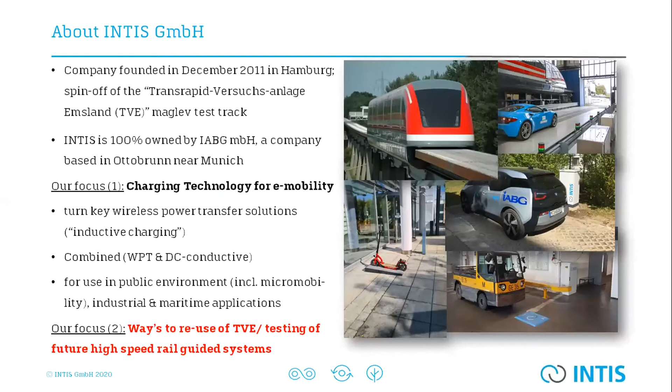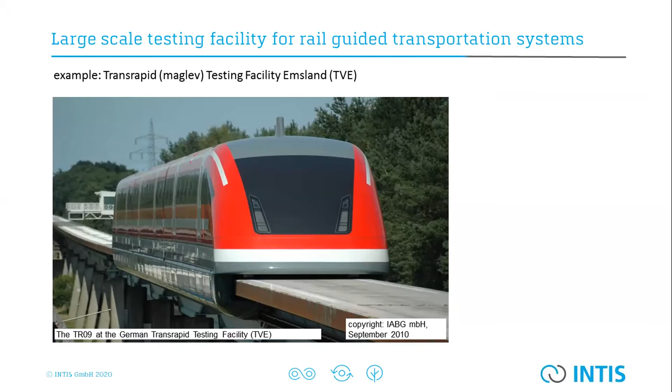Good afternoon to everybody. Very pleased to have a second chance to introduce a bit. Last time I had the chance to talk a bit about large-scale Hyperloop testing, possible Hyperloop testing facilities. I don't want to go through everything again because I think most of the audience did already participate at the last conference. If you remember, it was related to giving an overview about the maglev testing facility in the Emsland, which is still existing, which has not been taken away yet. And we are still looking forward to find future possibilities to provide services to high-speed rail applications. Might be maglev as this one, or might be also Hyperloop applications, where then obviously we would have to add something on top of the guideway, which I wanted to show you right here.

As also presented during our last meeting, there are different ways to get the facility converted to Hyperloop applications. Not necessarily from the beginning would a tube have to be mounted on the guideway, because most of the current developments are not yet at the stage to run their vehicle on guideways at full speed. So there are still a lot of investigations to be done with the vehicles and the motor, propulsion, guidance, levitation, which do not necessarily have to have a tube on top and run in vacuum, because many aspects still have to be investigated. Is the control system for levitation, for example, stable? How can you synchronize the motor with the vehicles?

That kind of questions. However, one day, if we come to the point to provide services at higher speeds, let's say more than 300 kilometers per hour, then obviously we need to put something on top of the guideway, where I have summarized here just a few ideas how it could work at our facility. Currently, the distance between the ground supports is 25 meters. We are not clear yet whether 25-meter long tube elements could be manufactured with tolerances as necessary for high-speed operations.

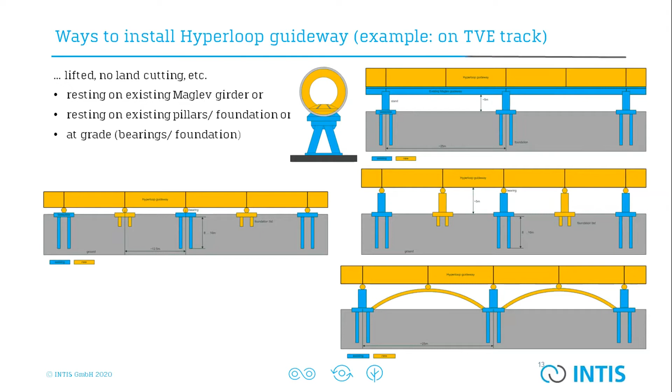During our last presentations, a few questions came up concerning inductive wireless charging, and therefore I would like to concentrate today a bit more on what wireless charging is and what role it could play for future Hyperloop applications. Therefore, I need to change now to another presentation.

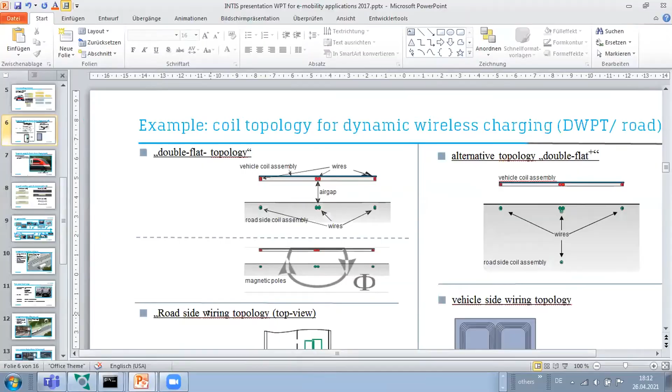So what I would like to introduce to you now is what is wireless power transfer systems, especially for mobility application, and here for today, how could it be used also for Hyperloop systems. First of all, just a few words to Intis. Intis today has two main tasks. One is to maintain and keep operational the maglev test, or to find future opportunities for maglev testing facility operations.

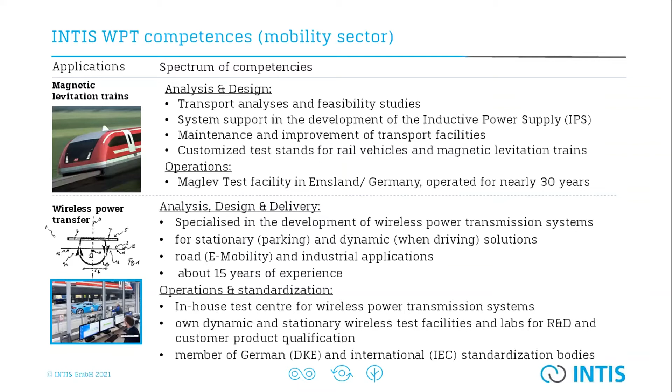And as we already with the TR09, the last German maglev vehicle, started to learn something about wireless charging, because this vehicle was already equipped with wireless charging equipment, we converted a bit our main engineering focus for today in the direction of wireless energy transfer systems for transportation applications. So what is wireless charging, and why do we believe that wireless charging can drive the transition to pure battery electric mobility, especially road mobility?

Well, later I will come to the point how it works, but there are a few aspects which obviously can help to drive transition to battery electric mobility. First of all, you do not have to plug a cable. It also supports autonomous driving and automated driving, and future driving without any drivers. It is fully automated.

It is invisible technology, because it's intended to put the coils which generate the magnetic field really under the floor, so there is no risk of degradation on the system components, or vandalism, things like this. It's highly efficient. It doesn't require any maintenance. That's very important.

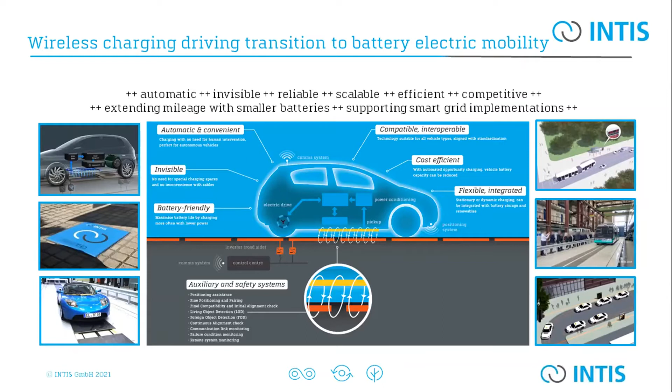And we can develop a vision that also in our future cities, where we hope to have many electric cars on the road, we provide some charging technology which doesn't require all this cabling, which I think is very important. Left and right, the pictures give some examples of wireless charging. Some of them I will dig into in the presentation now.

We distinguish between stationary wireless charging and dynamic wireless charging. Stationary wireless charging is quite comparable to conductive charging without cable, while the vehicle is always in a certain position, so stationary. For stationary applications, we consider transfer power in the range from 3.5 kilowatts to about 30 kilowatts. It's fully enough. If we talk about trams or buses or BRT systems, it may go higher, up to 300 kilowatt at least is possible.

It's a charging technology where the energy flows via a primary coil, which is installed in the road only at one charging point. And in accordance with standardization of wireless charging, we have to make sure that with misalignment of the coils in X and Y, driving and transfer direction, we are able to transfer the power with the full requested efficiency, which is defined as 85% or more, with misalignment of plus and minus 10 centimeters in each direction.

The primary coils will be invisibly installed on the surface or under the surface of the road, and the dimension of the coils, especially the secondary coils installed in the vehicle, drive the amount of power that can be transferred to the vehicle. It's contactless, free from wear, low maintenance, as I said. And the other part is dynamic charging. This is charging while driving.

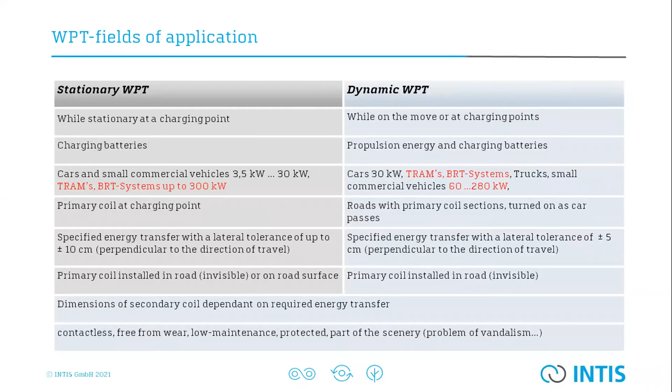The power transfer rates are a bit higher. For cars, we expect not more than 30 kilowatt of power to be transferred. For trams and buses, it might be something between 60 and 280 kilowatts. How does it look like? In the middle, we see this.

The vertical is the power path. Let's start at the lower part. We need somehow to connect to an energy supply or to a grid.

Then we have some components which convert the usually 50 hertz AC energy, current or voltage, to a quite high frequent alternating current, usually between 20 kilohertz and 85 kilohertz. That current is driven to a coil which converts to a magnetic field, and then from the road to the vehicle side, the vehicle also has such a coil. This alternating magnetic field is picked up by the vehicle side coil, is then being rectified and fed into the battery. This is the power path.

Today, if you look at standardized systems, it's going up to 25 to 85 kilohertz at 22 kilowatts.

There's a lot of equipment we need in addition for making sure that if there is some living object in the air gap between the two coils and the magnetic field density would overcome defined and allowed limits, the magnetic field will be switched off. That's what we call LOD, living object detection, and also foreign object detection, because if a thicker metallic part is placed directly on the road coil, it may heat up too much, and that also needs to be found out and switched off.

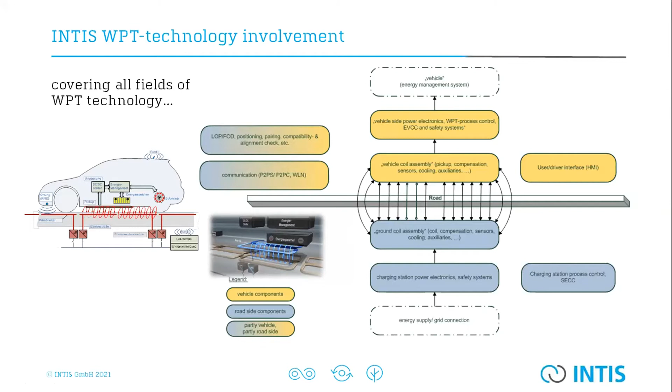This is what we call the auxiliary equipment. Then there is communication, because vehicle and primary side systems have to communicate to control the power and to ensure safety of the system.

There are different ways and topologies for the coils which you can install in the road or in the vehicle. Here's an example for a so-called double D, double pole geometry, which you see in the left down view. You can install it in a different way. On the right side, you see an example for the coil topology as it would have to be installed underneath a vehicle.

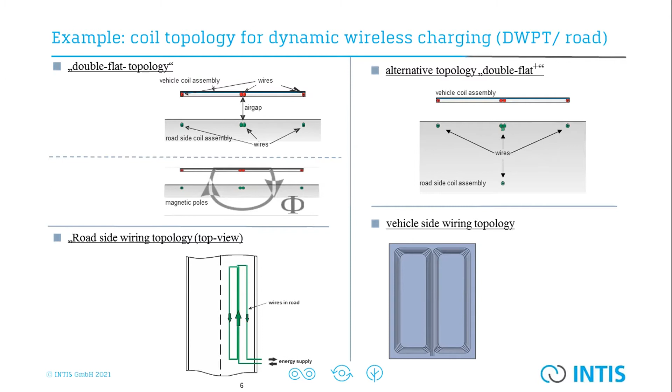Here is an example for dynamic wireless charging, already implemented in 2009 at our facility. You see the two big black cables underneath the guideway table. This was used for Transrapid when driving lower than about 80 kilometers per hour, in order to transfer power of up to 2 times 250 kilowatts to recharge the onboard batteries, at the time at a frequency of 20 kilohertz.

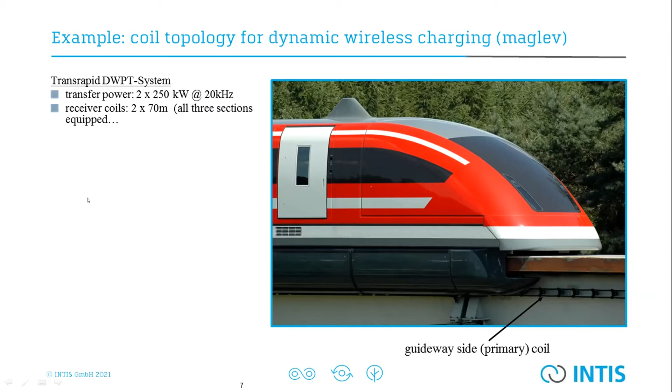Today we would go to higher frequency because semiconductors and electronics today support much higher frequencies. The pickup coils were installed in the maglev system, and there we had about 2 times 70 meters of space for installing the pickup coils in the vehicle, and therefore we could also provide the 250 kilowatts.

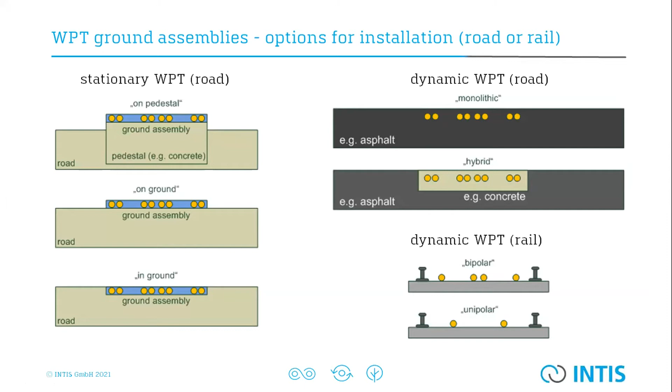This is a way we could install wireless charging coils, for example in the road, on ground or in ground, whereas in-ground is preferred today, or on the right side for dynamic wireless charging, either directly in the asphalt or a hybrid solution with concrete blocks in the roads. There are also two examples for how it could be done for rail application, not maglev but rail, where even though the steel rails are very close to the wires driven by the alternating current, they would not get too warm at distances more than 10 centimeters away.

This is the field of application for wireless charging.

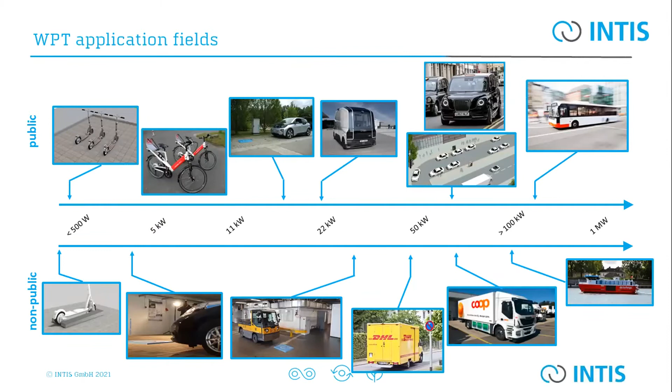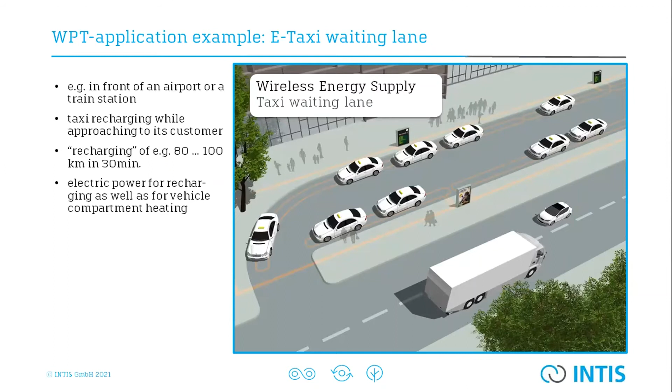Here's an application for dynamic wireless charging for taxi applications, which will be implemented with us and other partners currently in Cologne with LEVC London cab taxi vehicles, which shall run as from 2022.

Here are some ideas about dynamic wireless charging for buses. The idea is not only to charge a bus when it's waiting and exchanging passengers, but also using the whole lane, a specific lane, or in front of a traffic light. On the left side, we see such an implementation at our facility.

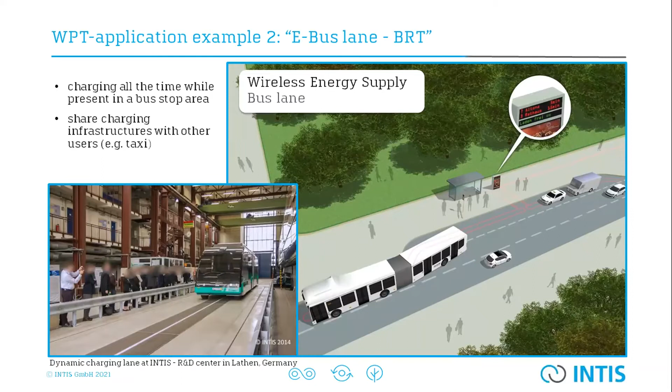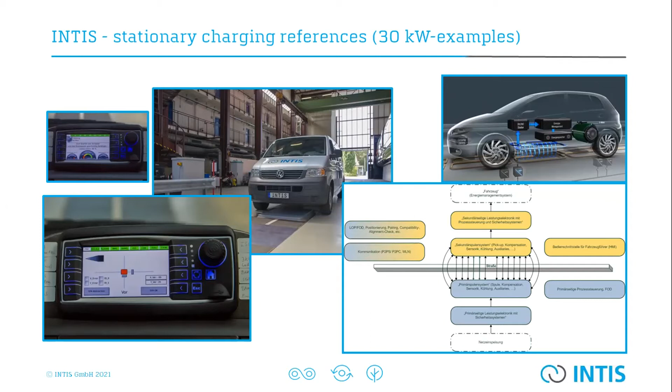Here are a few more photographs of how inductive charging systems look, and also a screenshot to give some positioning support. When you don't see the road coil anymore, you need to know where to go in order to align the coils to each other. Here are some other photographs. Recently, we have started work for autonomous vehicles.

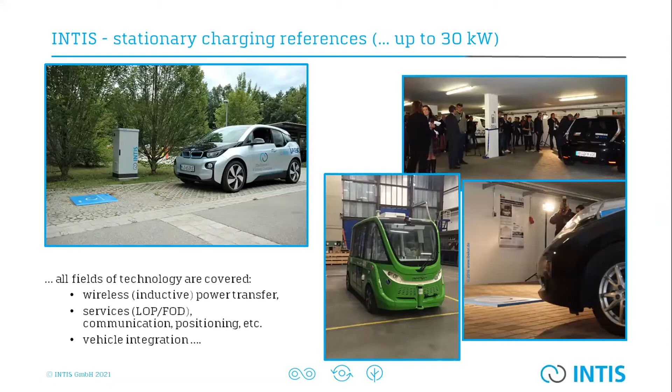It's a Navya vehicle from a French company, Navya, which will be equipped now with inductive charging for an application in Groningen. Top left, it's an application we have provided to Munich. This is stationary charging, 11 kilowatts, according to standards, and many more.

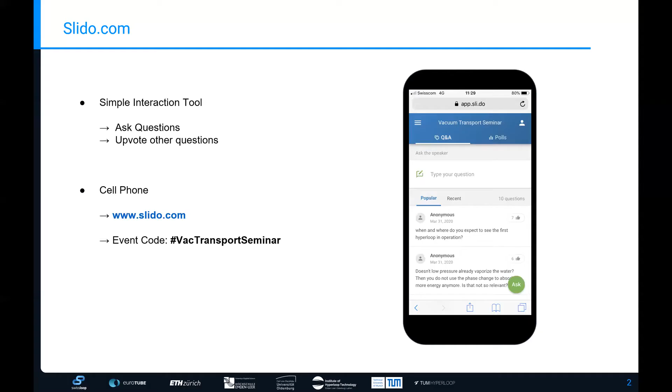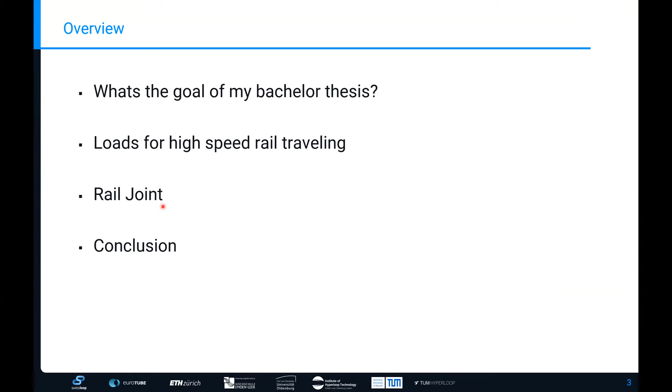We mentioned before where you can post your questions. So let's start with the overview. First, I'm going to talk about the goals of my bachelor thesis, then about the loads occurring for the special parameters we set at the Alpha Tube here in Switzerland. I'm also going to talk about the rail joint, which is crucial for our bridging mechanism, and at the end, I'm going to summarize everything.

So you probably know the situation: we have a vacuum tube on the right. There is a test track in this direction, already at low pressure, and now we want to enter the test track, the tube, with our pod. The problem is we don't want to flood the whole test track with atmospheric pressure, because it is a really big volume. So we install an airlock on the left side, which has a relatively small volume and doesn't take much time to pump out the air. We do that, and then we can open the valve which separated the two sections.

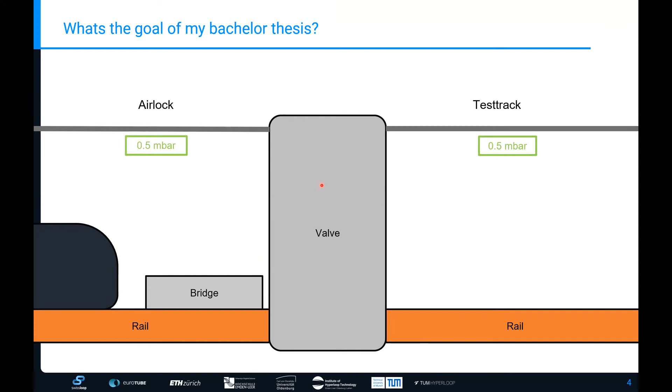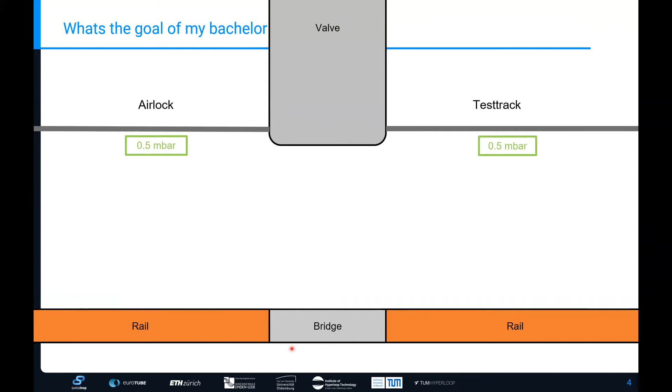Now there is a gap inside the rail, which we need to fill with a bridge, and then our pod can drive into the tube. The main task of my bachelor thesis is now to come up with a solution for this bridge, which also works for high speeds up to 900 kilometers per hour, which is the aim for the Alpha Tube test track.

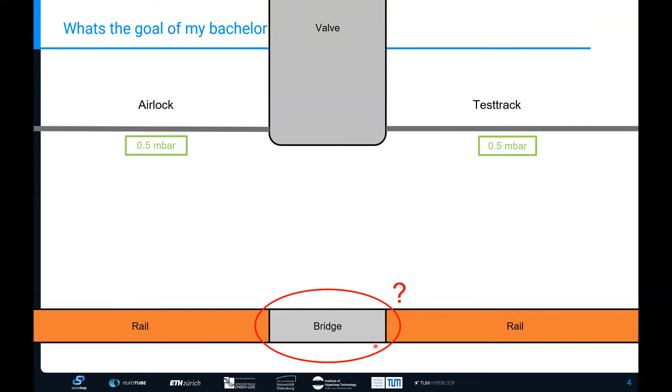The problem here is we use these rails as suspension rails on the left side and on the right side. We use these standard railway rails because we want to remain a certain interoperability between the pod and the standard railway. You can imagine, for example, that we drive long distances from Zurich to Geneva, and then for the last kilometers or meters, we leave the track, the tube, and drive on existing infrastructure, for example from the SBB. That's why we chose a standard rail profile.

The problem with this profile is that it has a big undercut, marked here in gray, and if you imagine the valve needs to slide from above, it is hard to seal this undercut. The solution is that we clear the valve gap here fully, so the geometry of the valve is easy and it is not hard to seal the outline of the tube.

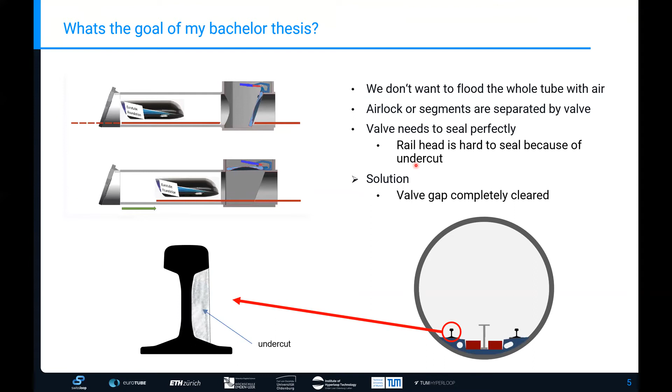Of course, this leads to problems, and the bridge needs to withstand some loads. Now I'm going to calculate the load specifically for the case of Alpha Tube.

The total weight of the pod is 1 ton, that's the total vehicle load. Later in commercial use, of course, this total weight will get bigger, but by adding more wheels, the wheel loads can be 1 ton or 2 tons. We also assume that the total load can rest on 1 wheel.

That's just the worst case we consider here. We also defined a load angle theta, which is often used in aviation. This load angle is the angle between the total acceleration and the gravitational acceleration. The total acceleration consists of the gravitational acceleration and the centripetal acceleration occurring in track turns. We set the maximum load angle to 30 degrees.

The reason for that is that the maximum banking angle in curves, alpha, is also 30 degrees. That means that when you're driving through a track turn at top speed, you don't have lateral accelerations parallel to the track bed. This is good for passenger comfort because then they are only pressed into the seat and not to the side.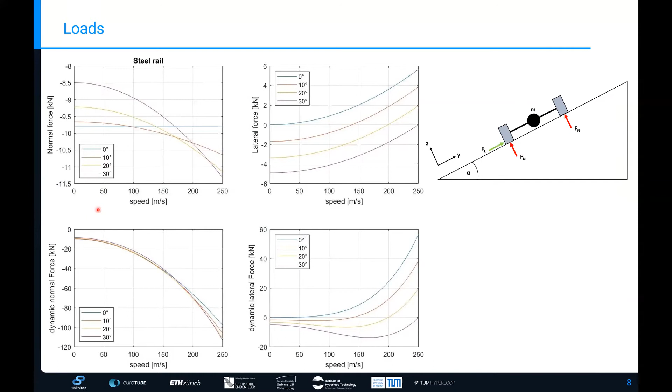I'm now interested in the maximum force inside a track turn or on a straight. For the maximum normal force, at our maximum banking angle, it is found at maximum velocity, and it is approximately 11.3 kilonewtons. As we said before, the lateral acceleration gets to 0 at top speed, so the maximum lateral force can be found at standstill and is about 4.9 kilonewtons.

We can compare that to the static forces occurring on a conventional rail, for example the SBB, and we can see that our forces are much lower. For the normal force, it is 10 times smaller than for standard railways, which means for the static forces, we are on the safe side for the rails. Of course, these forces need to be taken into account when calculating the stiffness of the bridging solution so that no big deformations or dislocations occur.

Additionally, there are dynamic forces. These dynamic forces occur because the rails are not perfectly flat, but have slight imperfections and waves on them, which lead to accelerations of the vehicle. For the lateral force, these dynamic effects are not very important because it gets smaller with increasing speed. But for the normal force, it can get up to 10 times bigger.

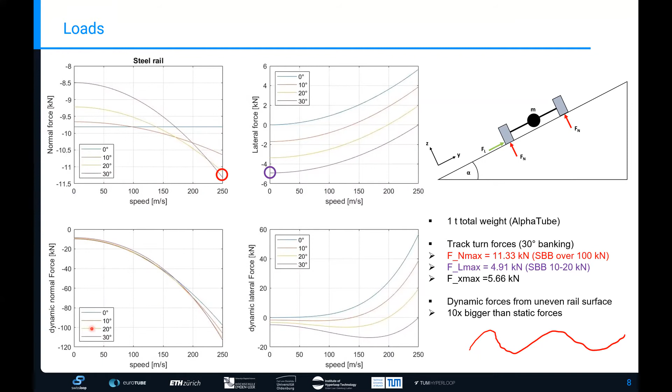So another crucial element is the rail joint, because we need to clear the valve gap. The two rail ends can't be welded together as it would be done on a normal railway.

Now I want to define, or at least discuss, which type of misalignment is most suitable for our high-speed case, so 900 kilometers per hour. The first case is a vertical drop, where the second rail is lower than the first one.

The good thing about this case is that from a critical speed on, about 10 kilometers per hour, the wheel loses contact with the first rail and becomes airborne. The advantage of that is that the impact speed stays constant and is only dependent on this vertical misalignment, so we get really low impact speeds and also low impact forces. The problem, however, is that this wheel can stay airborne for quite a long distance, and it needs to be observed if this has a big impact on the braking distance, for example.

The second case is this one, again a vertical step. This is the worst case of all three cases which can occur, because here the impact force rises linearly with the traveling speed.

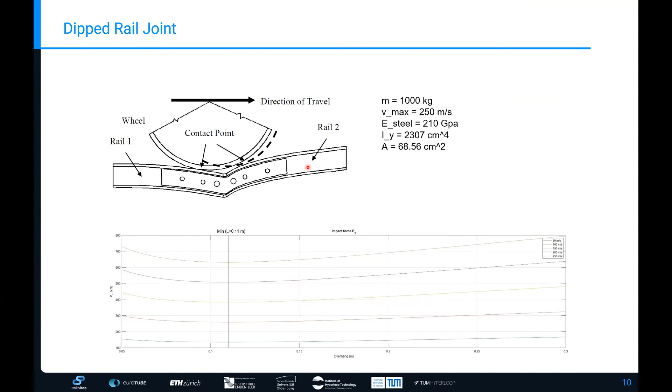For this specific case, I calculated the maximum impact force by doing energy conservation. Here on the top right, you can see again the parameters for our specific problem with our top speed and overhang length, and we get a maximum impact force of 650 kilonewtons. This is over 6 times higher than the static forces we found on the conventional railway. So this case is also not usable for our high speeds, and we can only use the first case with a vertical drop.

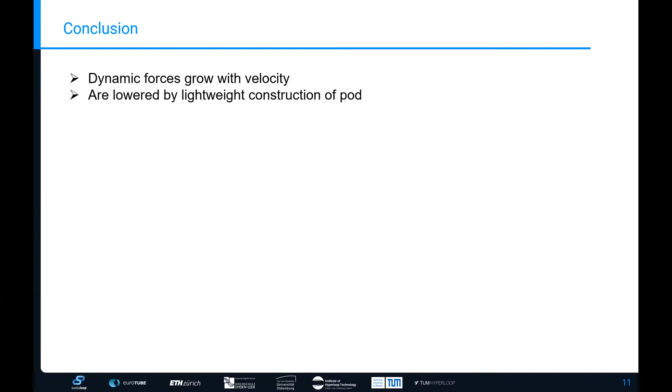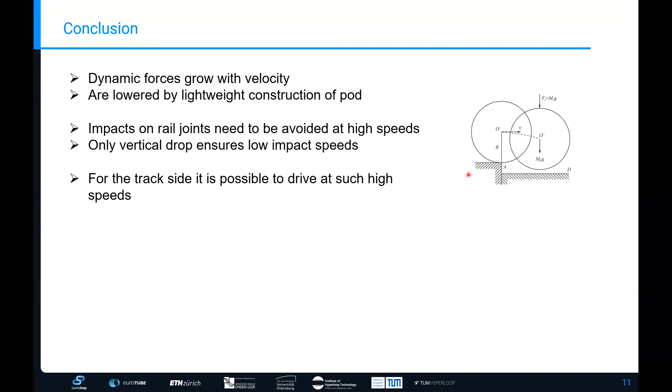So let's summarize everything I said today. First, we saw that the dynamic forces grow with velocity, but as we are using lightweight constructions for our pod, we can reduce the wheel load and therefore stay inside the borders we defined. Also the dynamic forces can be lowered by freshly grinding the rails, reducing imperfections and waves, which I talked about. The second thing we saw is the rail joints, where we need to avoid a big impact on the rail and the wheel. We saw that the only suitable case is the one where we have a vertical drop, which leads to low impact speeds. So for the track side, it is possible to drive at such high speeds with conventional wheels and conventional rails.

If we do tests and see that this wheel and rail pairing does not work, alternatively, the pod could also have a levitating system installed, which can be magnetic or with air cushion, and this would avoid these contact problems we have with the rail and the wheel.

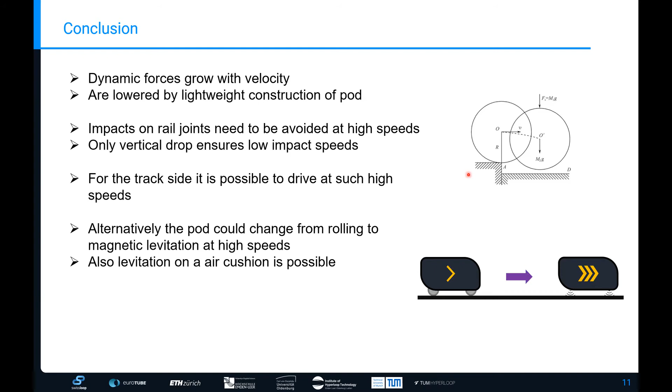So that was my presentation about high-speed railways. Thank you for your interest, and now it's time for your questions.

Thank you very much, Nico. It was very interesting. So we'd like to go to the first question.

The question is, what are the highest speeds that SBB normally drive over such rail gaps? So for instance, Weichen, switches.

Yes, so for SBB, for the rail joints and rail gaps, it's 80 kilometers per hour, but for the switches, the Weichen, it is higher, up to 150 kilometers per hour. There is also an example of the SNCF, the French railways, where they did a high-speed run of the TGV, and there they ran over a switch with over 400 kilometers per hour. I think it was even around 500 kilometers per hour. It's very high. Yes.

Then the next question, somebody's wondering regarding the airborne case you talked about. Can you give an estimate of travel distance for a 0.1 or 0.25 millimeter gap? So I calculated the case where we have a misalignment of around 1 millimeter, a vertical misalignment, and there the wheel can stay airborne for around 3.5 meters traveling distance.

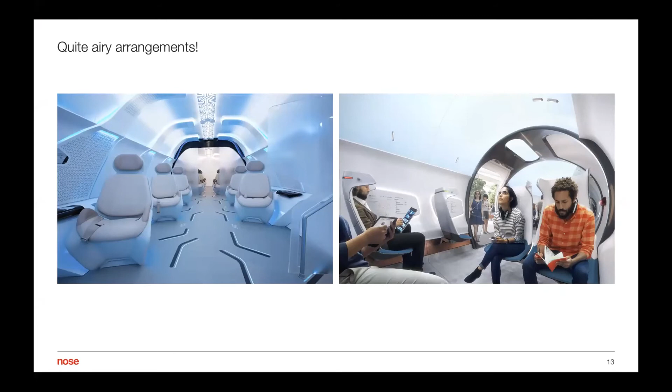So when I was looking at the current Hyperloop ideas and concepts, I was looking also at the interior design, or the stuff you see on the internet. You see studies, mock-ups, one-to-one. Here on the left side, for Dubai, I think, they did actually build a nice mock-up. Here on the right side, it's just a rendering. And then there was a study of Teague Associates, also industrial designers. And I looked at all these pictures and I thought for myself, okay, this looks quite okay-ish.

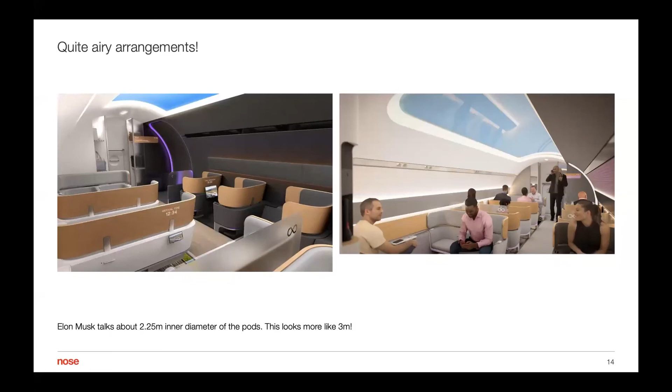But on the other hand, I've seen that Elon Musk, in the original paper, I assume, was talking about an inner diameter of the pods of 2.25 meters. And that was even the larger pod he was talking about. He was also talking about an even smaller pod, which was dramatically smaller. So I look at these pictures and say, oh, wow, this looks more like a little bit more than 3 meters diameter. And so I thought, obviously, this is a unique opportunity for the whole industry to make a clever and strategically sound decision on what is going to be the best diameter for this new exciting technology.

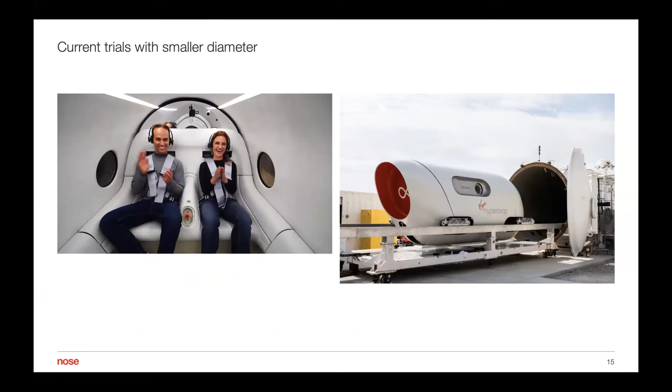The current trials are done with really small pods. I think you're all familiar with this one. And so I was thinking maybe it's a good idea to look a little bit sideways. What are other industries doing, or what have they been doing? So I was trying to make an interesting comparison with commercial airplanes.

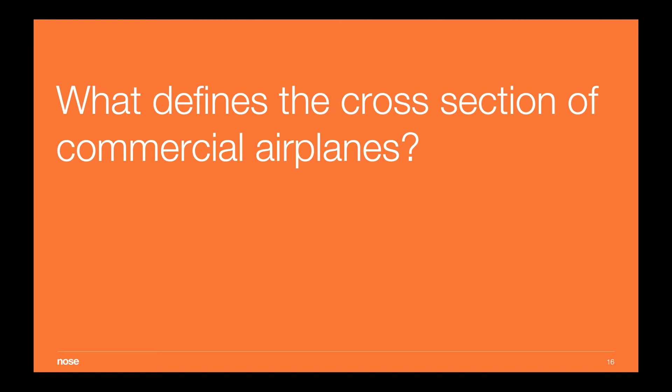I would say commercial aviation has been happening for roughly 80, 90, 100 years. So they had a lot of time to optimize the technology. And there's a very capitalistic system behind it. In most cases, there are no subsidies from the state. So somehow it's like an evolution forced by commercial forces: what is reasonable depending on the spectrum of usage.

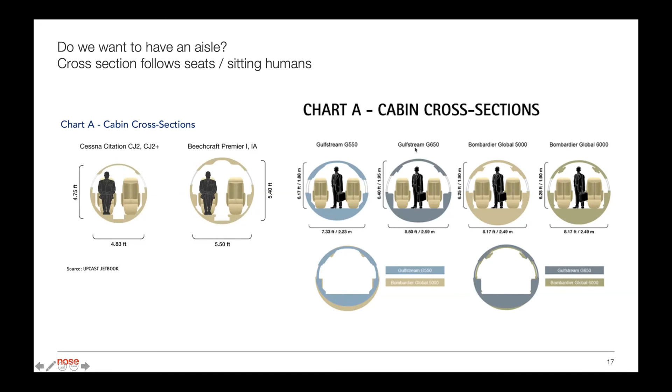So I was looking on the internet at typical cross sections of airplanes. Obviously you start with very small diameters where you don't even have an aisle. You should not do too long tubes like that because nobody would be able to enter properly. Then the next step, a little bit larger, where you have kind of an aisle. Then you take a next step and have one aisle. Obviously you waste a lot of surface if you look at it from the ground floor, or if you look at the diameter, you waste a lot of cross section just for getting to your seats. Things improve when you go to larger diameters.

But to give you an example, if you look at cross sections, 2x2 arrangement, 3x3 arrangement, you never see a 2x3 arrangement. And then if you go further from 6 in a row to 7 in a row, you discover, oops, you need a second aisle. And then you make a jump from like 4 meters something to almost 5 meters. So obviously you cannot scale it smoothly as you might want to, but you have to decide: are we going to start with a proper diameter for the pod and then deduce the diameter of the tube, or do we go the other way around and look on the market for tubes which we can buy ready as they are?

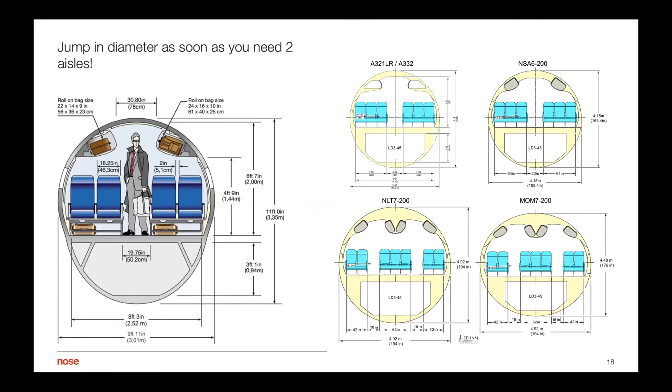And so I came back to railways and was looking, okay, what happened actually in the railway sector a long time ago? And if you look into history, we have certain standards developed regarding the expectations of passengers. If you look at what's happening on the market nowadays, you could simplify it and break it down to these requirements. Typical passengers think up to 10 minutes standing is okay; for 10 to 20 minutes, a perch seat, a bum rest, would be needed.

If you expect to travel up to 30 minutes, people want to be properly seated. It doesn't have to be such a comfortable seat, but it should be a seat. If we go to 120 minutes, we end up with intercity seats with tables. People want to work, listen to music, watch videos. They will need a toilet. They will take along larger luggage.

So if you increase the travel time beyond a certain measurement, you end up with this whole list of amenities you have to provide. Things go absolutely out of hand. If you go up to 600 minutes, 10 hours, you definitely will need a restaurant. Otherwise, people will have a little revolution on your train. And if you go above 10 hours, obviously you need beds. People want to go to sleep and so on.

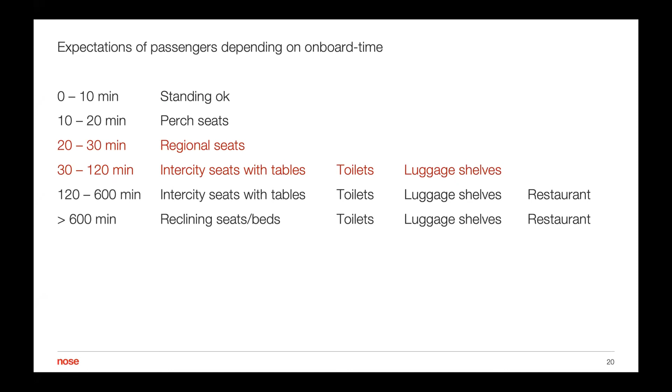So now what we are currently talking about is, like Elon Musk talks about, 35 minutes. So we are somewhere around here. Critical for us will be toilets and luggage shelves. Is it going to be necessary to provide toilets? It depends on what kind of passengers you want to talk to. If you talk about elderly people, it might be an absolute requirement.

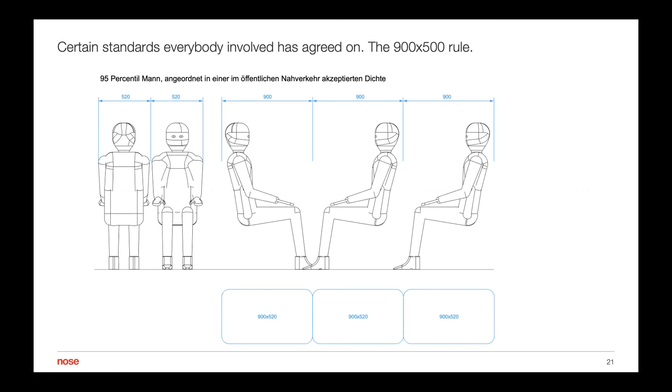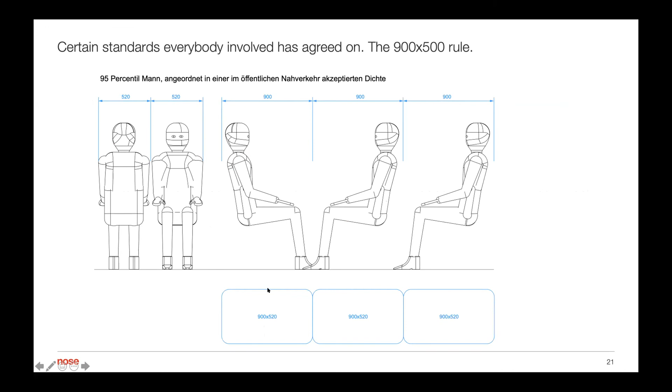Then in the railway market, we have certain standards which almost everybody has agreed upon by now. I call it the 900 by 500 rule. Roughly, everybody is more or less happy if he gets 900 in this direction, which is much more than in a typical airplane, and a width of 500, 520, 480, depending on comfort.

So then we have in the railway market also quite an interesting problem: we have some laws. We cannot do what we want to do. There's a European law: if you have a regular schedule of public transport, you are required to have at least 10% of all seats cater for the needs of persons with reduced mobility. We call them the so-called priority seats for PRM.

For example, this is a picture out of the norm. They require you to provide certain spaces. They require that the armrests have to be foldable. If somebody is very heavy and fragile, you have to fold up the armrest and so on. So typically the SBB, Deutsche Bahn and ÖBB provide everybody this comfort. Otherwise, it would be too complicated to make a distinction between those seats and the special seats.

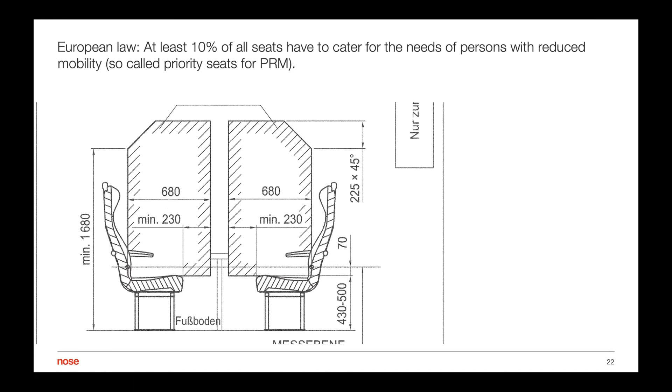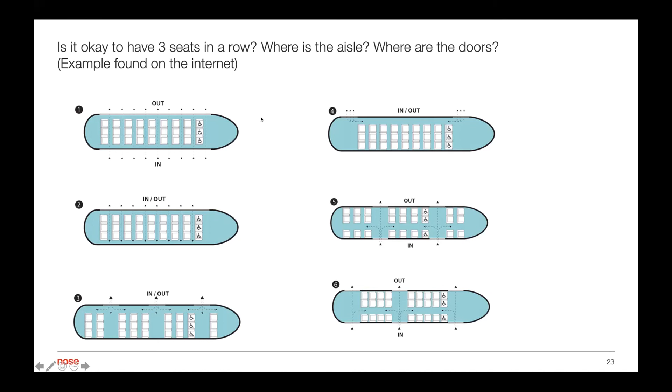Then the big question: what is socially okay? Is it okay to sit 3 in a row? And if you do that, do you enter along the train at certain points? Are there going to be 1 aisle, 2 aisles? How many doors? Quite difficult tasks. If you have a pressurized cabin, if you look at a typical airplane door, it's quite a construction. So you don't want too many doors, and probably not necessarily sliding doors. This is just an example found on the internet.

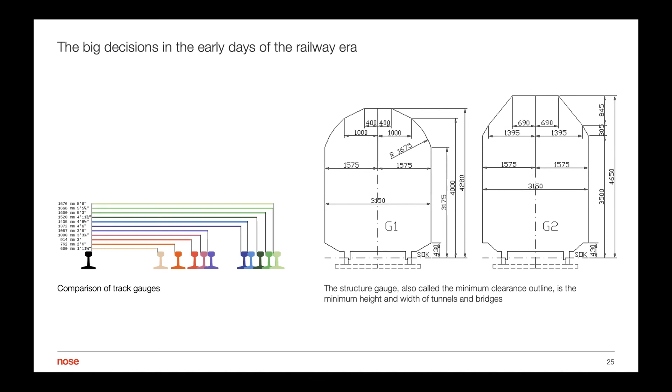Then, together with other railway projects, we found out it's always the infrastructure that is dangerous, meaning expensive. And so that's where I come to this big decision point. In the early times of railway, there was a lot of discussion on the proper track gauges, and on the proper structure gauge. This is the cross section of the tunnel you have to fit into, the minimum clearance outline every train has to pass through. And I'll give you a little example.

If you compare a little 1 meter track railway up in the Swiss mountains, the 1 meter allows, together with the slow speed, that's something really important, to have small radiuses, which means you can follow the terrain quite easily. And that means you have smaller bridges, smaller infrastructure cost.

And if you compare it with a typical high-speed train of today, if the terrain is not so suitable, not so flat, you have a sequence of bridges and tunnels and bridges and tunnels, nothing else. So these things get really expensive depending on the speed, which we are not going to alter in our project, I think. But nevertheless, the cross-section will play a part in defining the cost for the tunnels and the bridges.

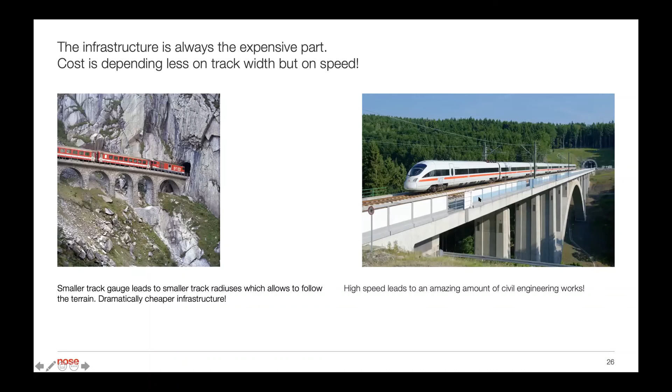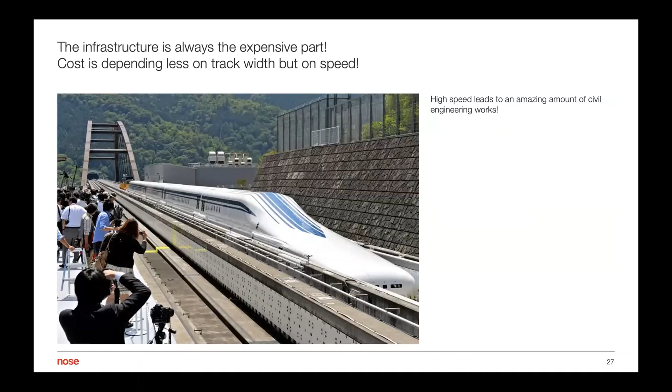A really bad example of extremely expensive infrastructure you find in the Japanese maglev, where they have chosen quite a hilly test track area, which is amazing. They have built like 40 kilometers of only bridges and tunnels. So how would the cross-section look if we designed according to the rules of the railway industry?

And so I started with a typical railway seat with the typical dimensions, typical aisle width, which is also required by European law. And then I tried to fit the smallest possible diameter around it, leaving the extra space for lighting, the yellow stuff, fresh air, old air ducts, the blue stuff here, and maybe squeezing in a really small toilet. Could work like that.

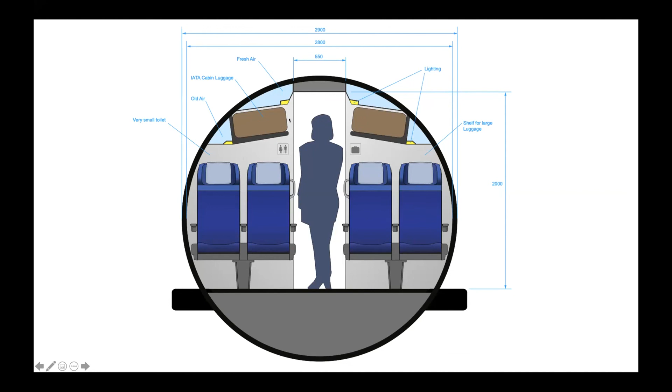People will not be so happy. It will not look as beautiful as the renderings we have seen before. You have to imagine when you walk through this aisle, you will have your head in this really confined space. And then if you want to sit down, you have to hunker down and kind of squeeze into this area. But well, that could be done.

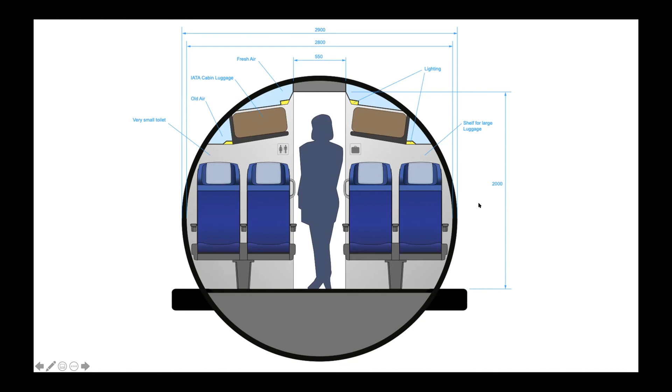You will have to add another 50% of the actual seating area to just include these things. So that leads to the idea, maybe it's a better idea to have like 50 seats in one pod. So 50 people would share one toilet, and that would improve the overall efficiency.

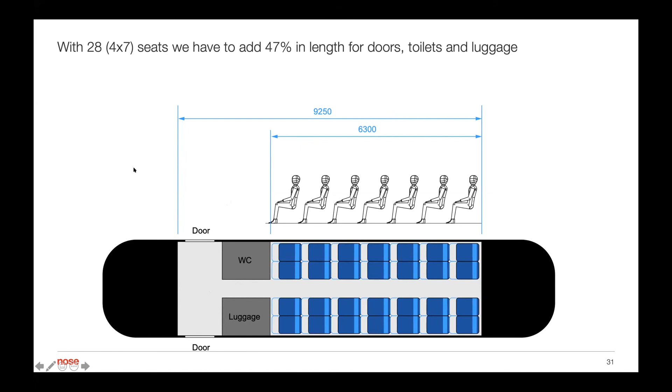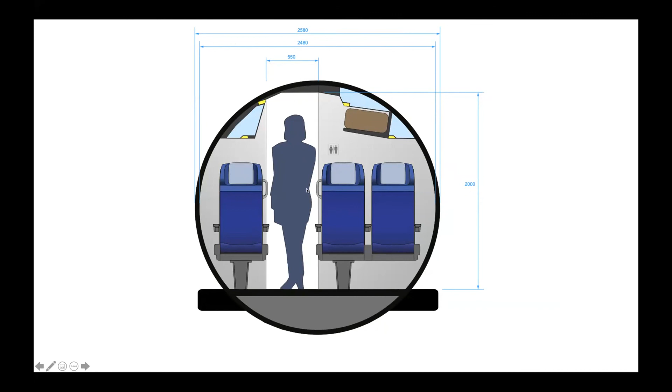If you squeeze even further, you end up wasting space here, because in this case, I chose the diameter so that we still have this aisle height, which is required to be 2,000. And so if you take this as a given, you end up with a diameter of 2,480 on the inner side, and a diameter for the tube of still 2,580.

And if you look at this situation, considering length, you have to add a little bit more, 47%, but still, it's the same thing. Make it longer and you will improve efficiency. But you cannot always make it longer and longer, because in the end you will need a second door, and then you have to put in extra space and weight again. So it's really a fine balance finding the optimum.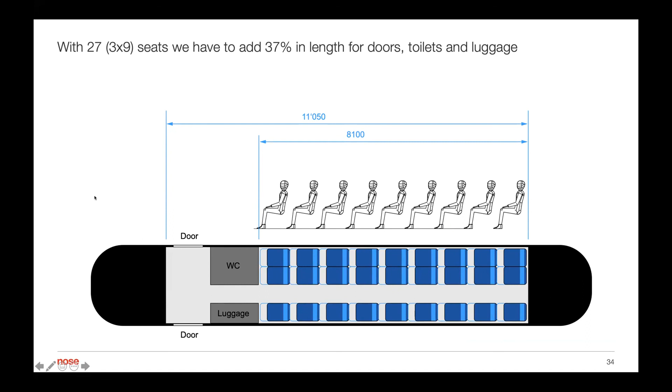So this is the end of my presentation. Thank you. Any questions? Thank you very much, Christian Harbeke. It was really very interesting to have such an insight, besides all the otherwise very technically focused topics. So I would like to dive into the questions.

The first question is, do you also consider the psychological aspect when designing the interior? How would you solve, for instance, the problem of not having windows in the pod? Yeah, good question.

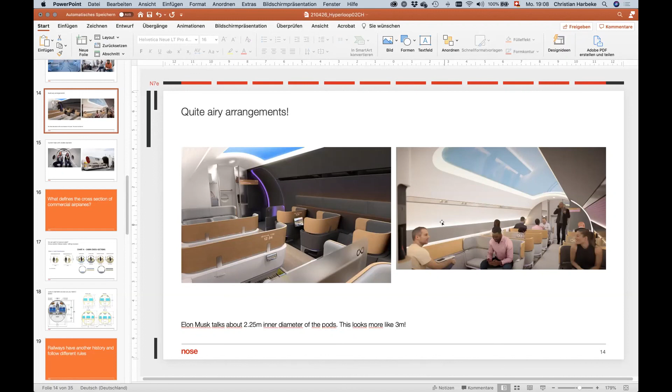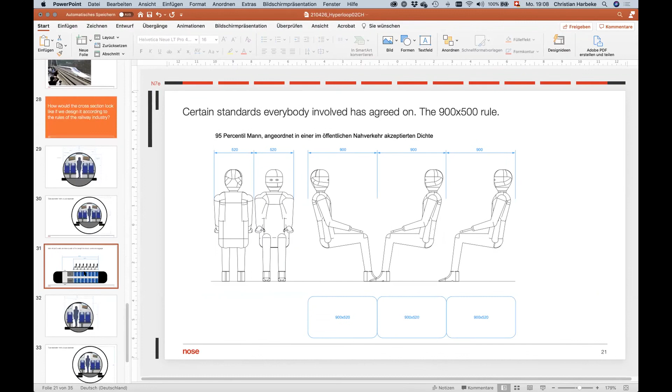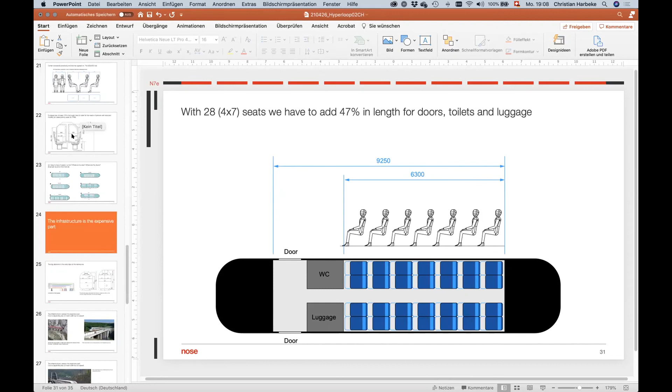Yeah, it's quite simple. You just have to follow this rule, 900 by 520, and then you arrange them like that. If you go crazy, you squeeze it to 800, and then you might add a third one on both sides, 6 in a row with a small aisle in between. That's more or less the maximum. Then you're looking at something like Ryanair flying to Mallorca, that kind of arrangement with a pitch of like 800, something like that.

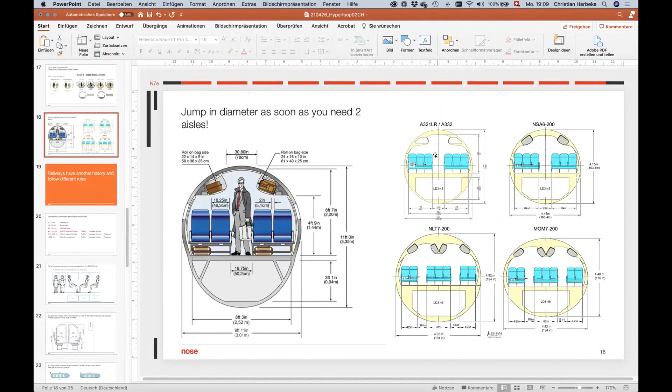But the market shows that people often think about the price first, choose Ryanair or EasyJet. It's less expensive, and then they discover, okay, I have to sit for 4 hours in a really tight space.

Okay, then we have 2 questions which are quite similar, so I combined them. 2 people are wondering how the seats will be designed. One is wondering, will it be like a tram or metro seat? And the other is wondering, will it be like bucket seats in fast cars?

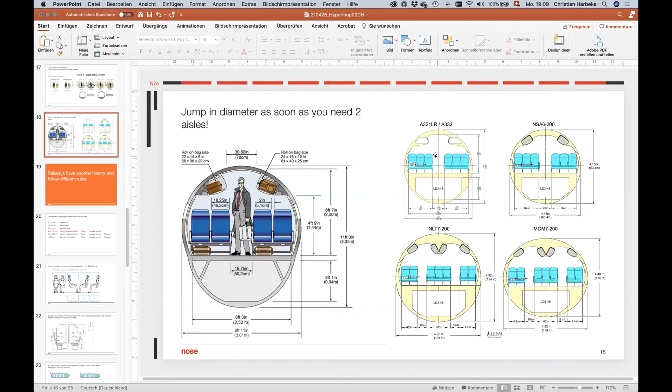That's quite an interesting question. If you want to put some G-forces, lateral forces and longitudinal forces, then we will need some kind of racing seat. But it's like a marketing decision. You either have a roller coaster feeling, pretty exciting, a lot of acceleration, you get a racing seat, you feel like sitting in a Porsche without windows, and then you hurry up and you're fast. And then you just look into your iPhone or whatever, and it's small.

Or the advantage of current railway travel is you can stand up, you can walk around, you can have a phone call, take out your laptop, start working, and all these things, which are not possible in a confined space with racing seats. And also there, I see a clear distinction. When you go above 30 minutes, I think things start to change.

If I'm on a train for more than like 15 minutes, I start working, on a current train. Other people wait a bit more maybe, but really, if you're sitting 1 hour in a train, you want to have some comfort. You might want to sleep. You need a comfortable seat and something to drink, laptop, music, video, yeah. Then you change a lot of things, you should even change the acceleration forward and sideways.

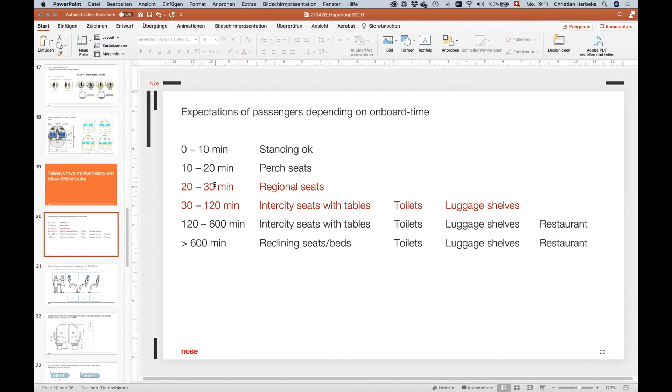And then you have the whole problems of the laws. In European travel, if you have a regular schedule, you have the Bundesamt für Verkehr, the Eisenbahnbundesamt, and so on, and they have regulations, and the Behindertengleichstellungsgesetz, so you have to provide everybody the same comfort, have a lot of space for wheelchair users, extra space for people like that, and certain angles required, certain seat height required, grab handles required. So in the end you will end up with something similar to a railway seat. Maybe a mixture, maybe you'd pay some extra money to make it lighter than a railway seat.